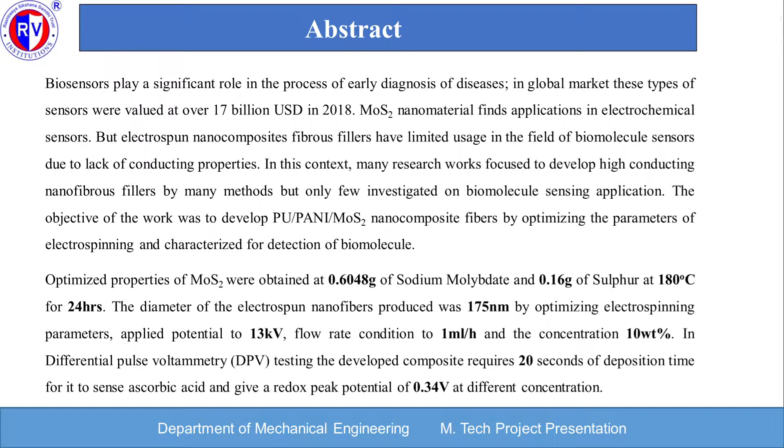Our objectives of the project: to synthesize and characterize the unique nanostructures of molybdenum disulfide, analyze and optimize the synthesis parameters of the nano-MoS2 preparation method, optimize electrospinning process parameters, then fabricate and characterize nano-MoS2 embedded PU-PANI nanofibers, and test biomolecule sensing of nano-MoS2 embedded PU-PANI composites.

This is the methodology we have followed in our project. First, hydrothermal synthesis of nano-MoS2 by varying composition of solvent, precursors and process temperature. Then characterization of nano-MoS2 by XRD and SEM, and fabrication of PU nanofibers by electrospinning by varying electrode potential, flow rate, viscosity and tip to collector distance.

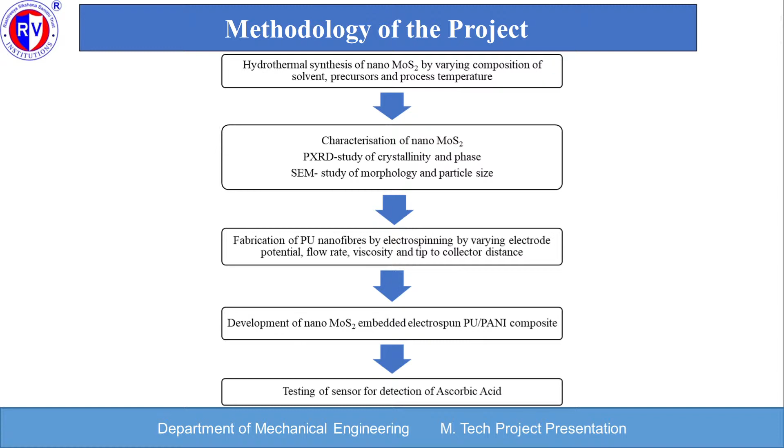Development of nano-MoS2 embedded electrospun PU-PANI composite. Testing of sensor for detection of ascorbic acid. The first step in our project is the preparation of nanomaterials. It is done by the hydrothermal method.

Hydrothermal method. In this method, chemical reaction of molybdenum and sulfur precursors at the critical point of the solvent is done in sealed vessels. Reaction at critical point increases rate of reaction and assists nucleation. Size and morphology of nanoparticles can be modified by varying reaction time, temperature and precursors. The hydrothermal process consists of two phases: nucleation and growth.

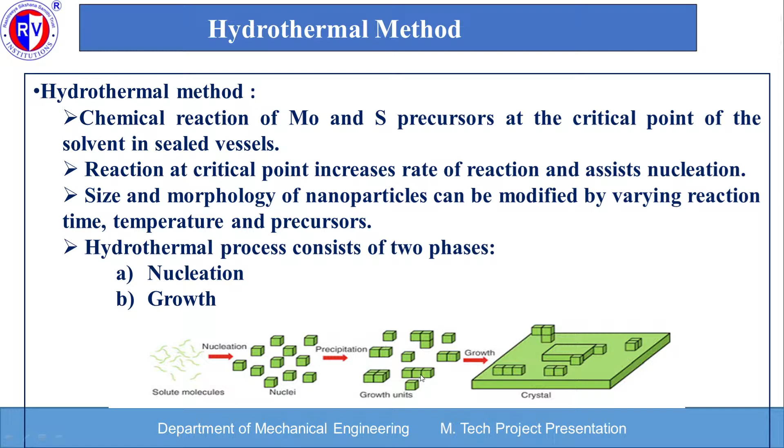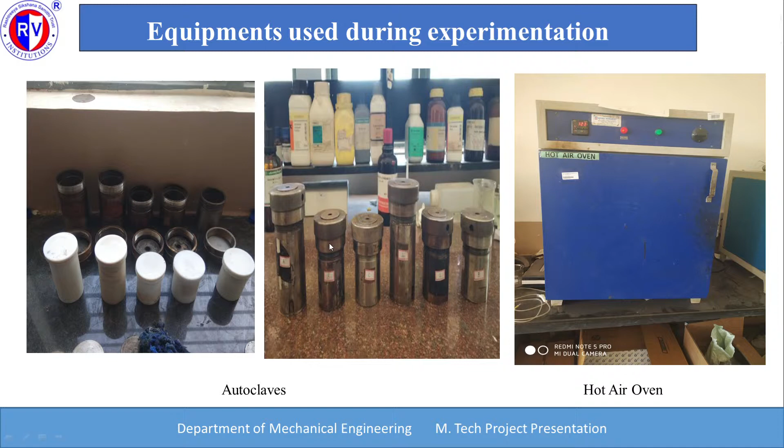As you can see in the figure, here the nucleation starts, the nuclei are present, the precipitation occurs and the growth of the crystal occurs. These are the equipments used during experimentation. These are the Teflon tubes, these are the sealed containers, and this is the hot air oven.

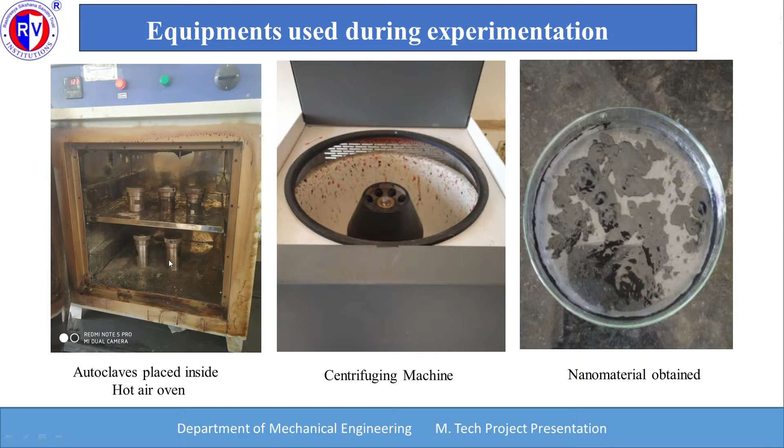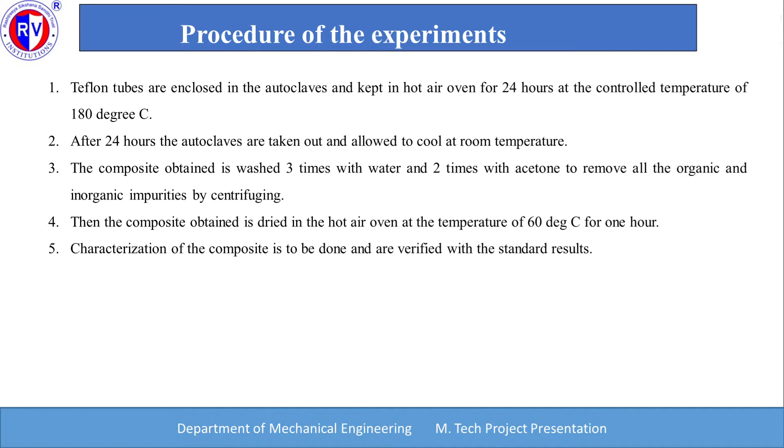First set of experiments, these are the SEM results we have got. These are sphere-like structures which are present, and further in the magnification we can see that in that sphere fiber-like structures are present. The MoS2 presence is confirmed by the hexagonal crystalline structure.

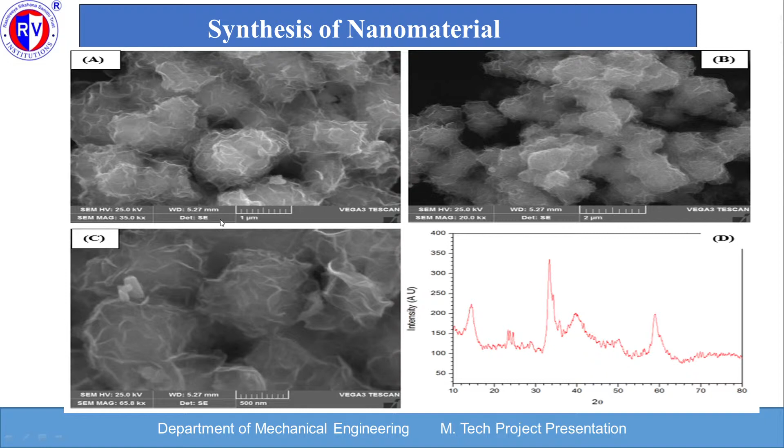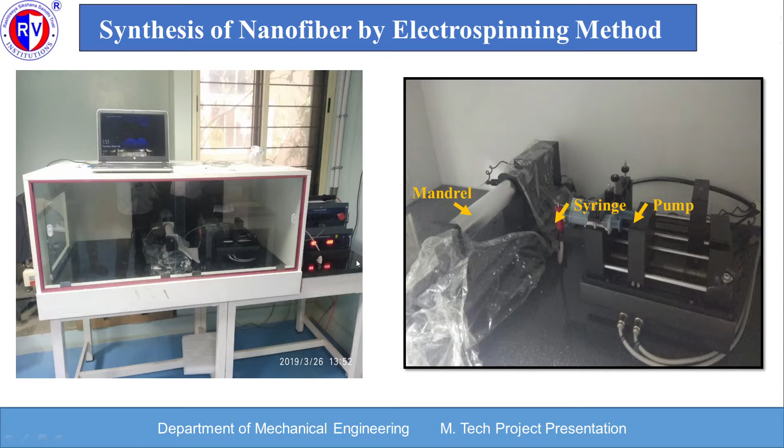This is the second set of experiments. In this set, spongy cotton-like structures are obtained, and in the third set, the same cluster of spongy cottons occurs. The next step of our project is the synthesis of nanofiber by the electrospinning method. This is the electrospinning setup. This is the mandrel, this is the syringe, and this is the pump.

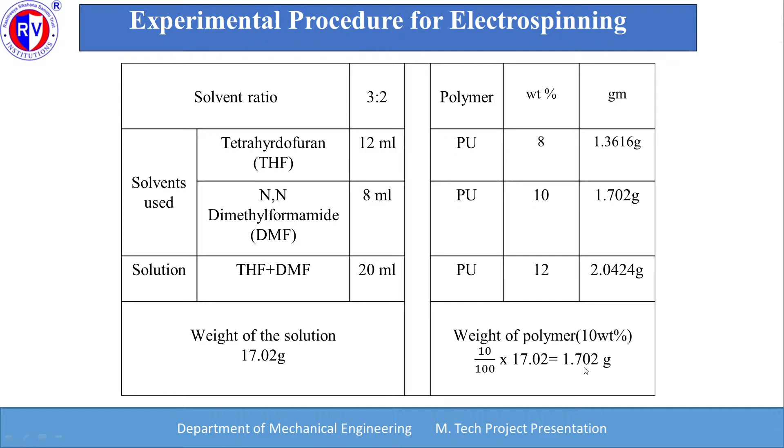So what is the experimental procedure for electrospinning? First, we have used THF and DMF in the ratio of 3:2 and weight percentage of 10, and the weight of the polymer we got is 1.702 grams. Then second, the process optimization of PU nanofiber.

Each of the parameters, flow rate, applied potential, and solution concentration, was individually varied while keeping all the other parameters constant to study each one's influence on fiber structure and diameter. First, optimization of flow rate. The solution concentration and applied voltage are kept constant and the flow rate is changed.

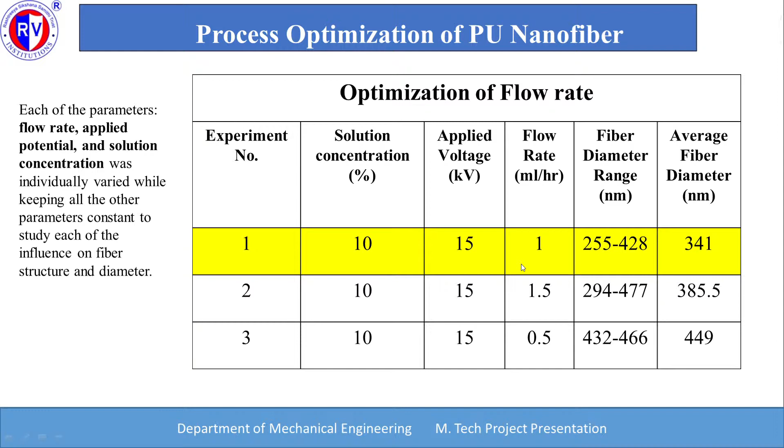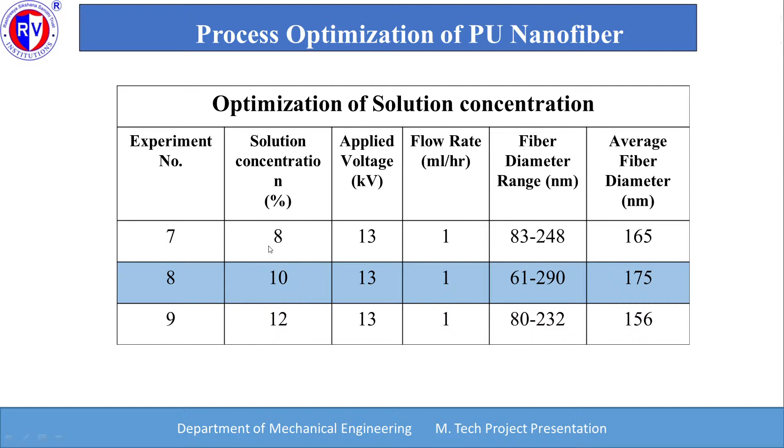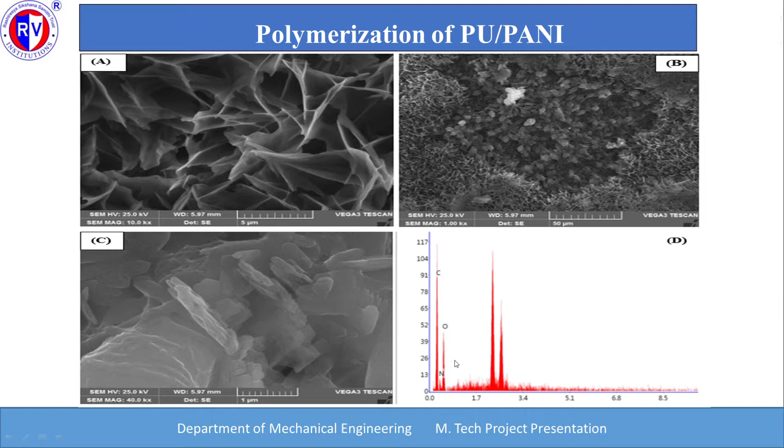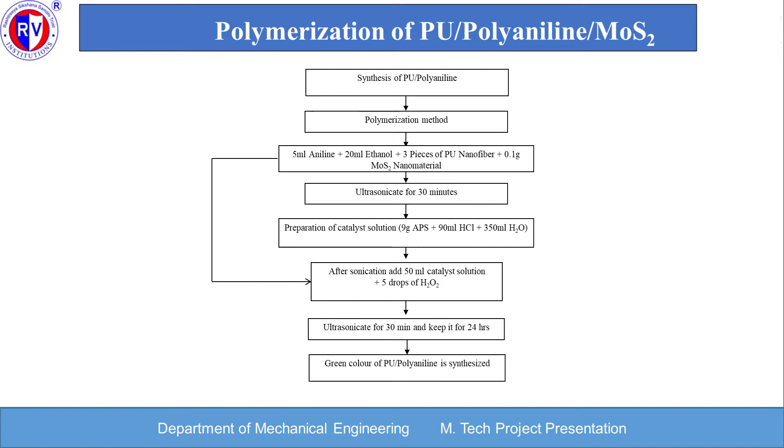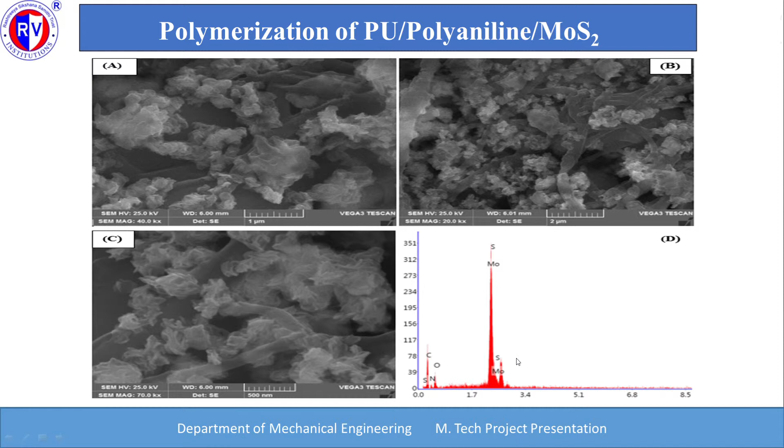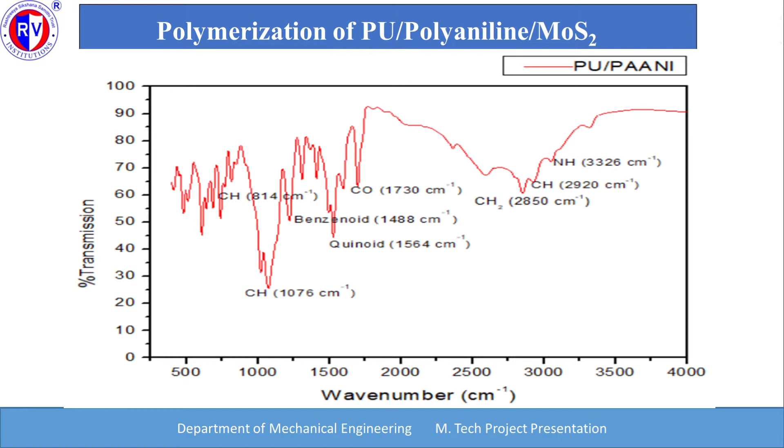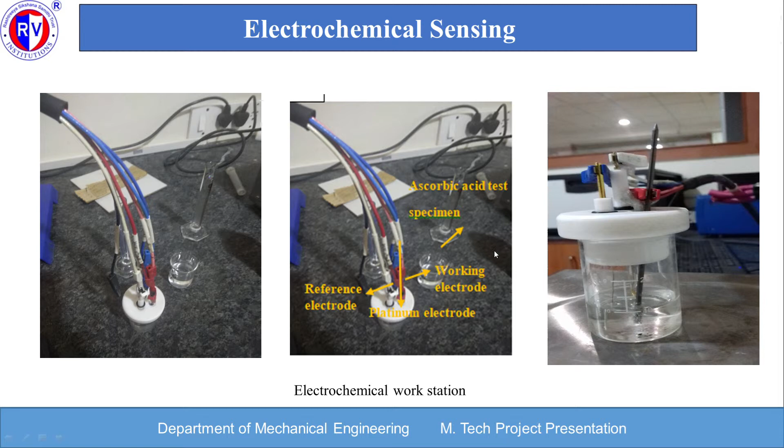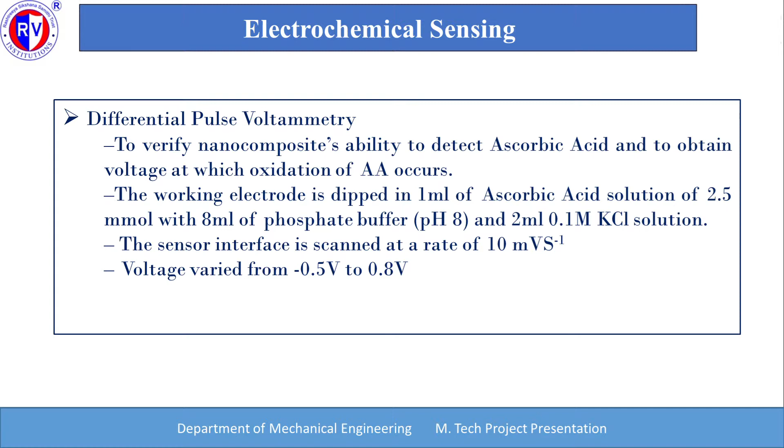The next step is to test our fiber with differential pulse voltammetry to verify the nanocomposite's ability to detect ascorbic acid and to obtain the voltage at which oxidation of AA occurs. The working electrode is dipped in 1 ml of ascorbic acid solution of 2.5 mmol with 8 ml of phosphate buffer and 2 ml of 0.1 M KCl solution. The sensor interface is scanned at the rate of 10 mV per second. Voltage varied from minus 0.5 volt to 0.8 volt.

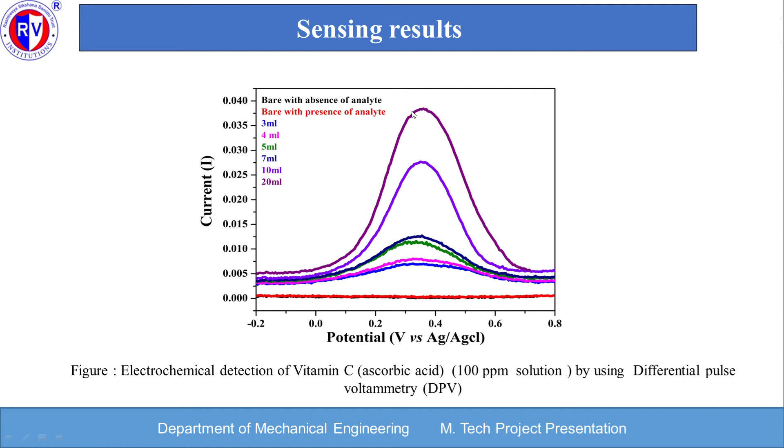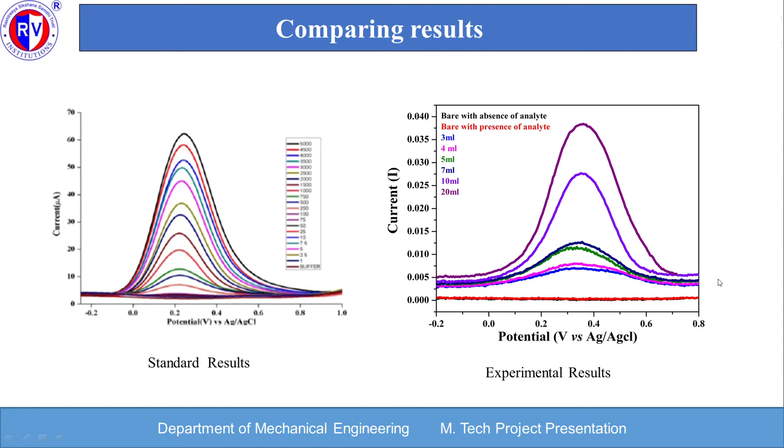This is the differential pulse voltammetry of the sensed vitamin C, ascorbic acid. As you can see, as the concentration increases, the detection level also increases and the graph also increases. These are with the bare electrodes, and these are the concentrations of 3 ml, 4 ml, 5 ml, 7 ml, 10 ml and 20 ml. This is the comparison of the results with the standard results. This is the standard result and this is our experimental result, which is in agreement with the standard results.

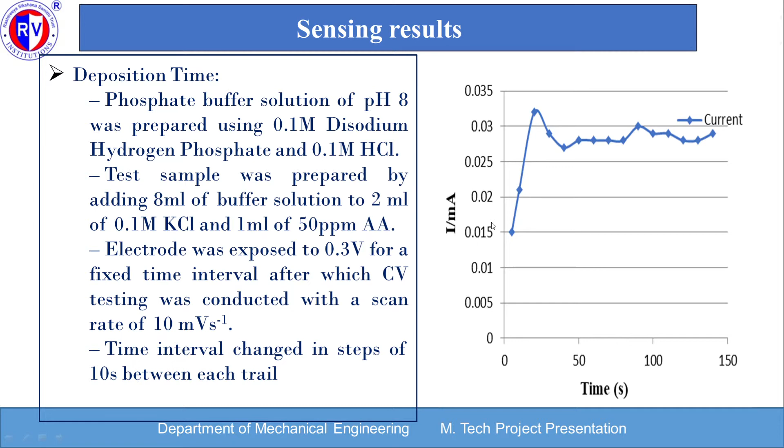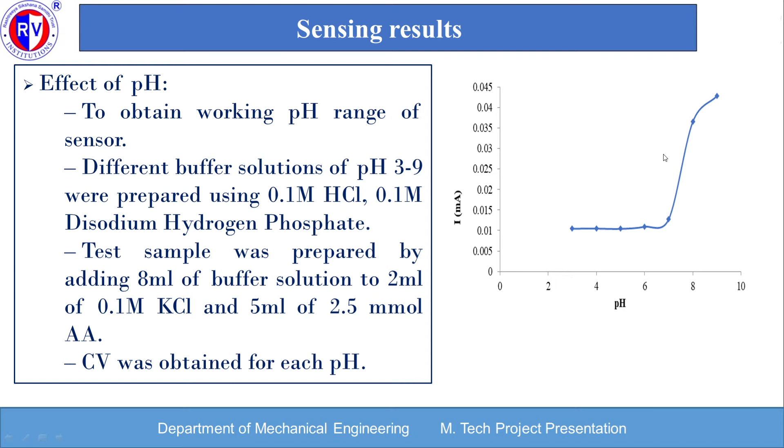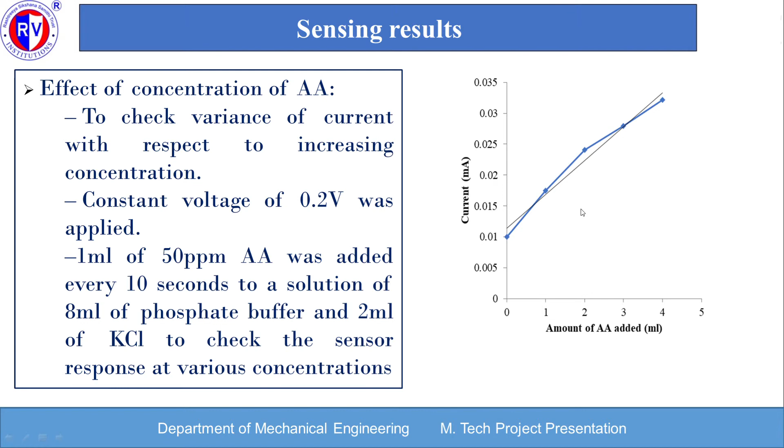Lastly, the conclusion of our project. Parametric optimization of electrospinning was carried out and the following parameters were fixed for the study. Flow rate of spinning solution is 1 ml per hour. Applied potential 13 kilovolts. Concentration 10 weight percentage. PU nanofibers of 175 nanometers in diameter were developed by electrospinning. MoS2 nanoparticles were synthesized by hydrothermal method. Further, the PXRD study revealed the phase of the nanoparticles obtained.

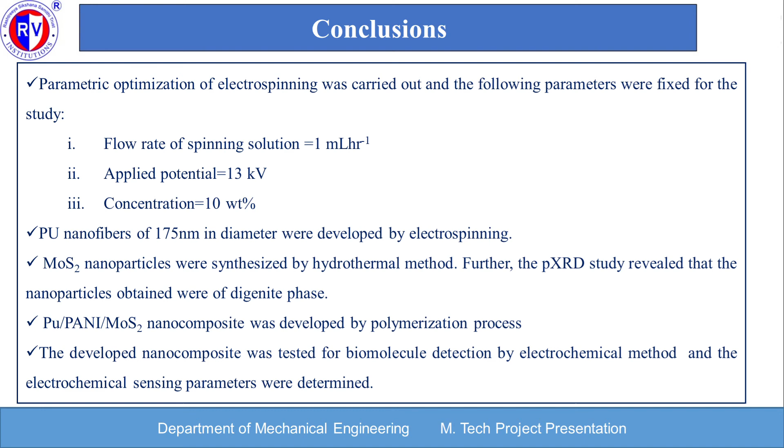PU PANI MoS2 nanocomposites were developed by polymerization process. The developed nanocomposite was tested for biomolecule detection by electrochemical method, and the electrochemical sensing parameters were determined. Future scope: the present study can be extended to study the interference of other biomolecules such as dopamine, uric acid, and glucose in the determination of ascorbic acid. Secondly, commercialization of the developed sensors can be done.